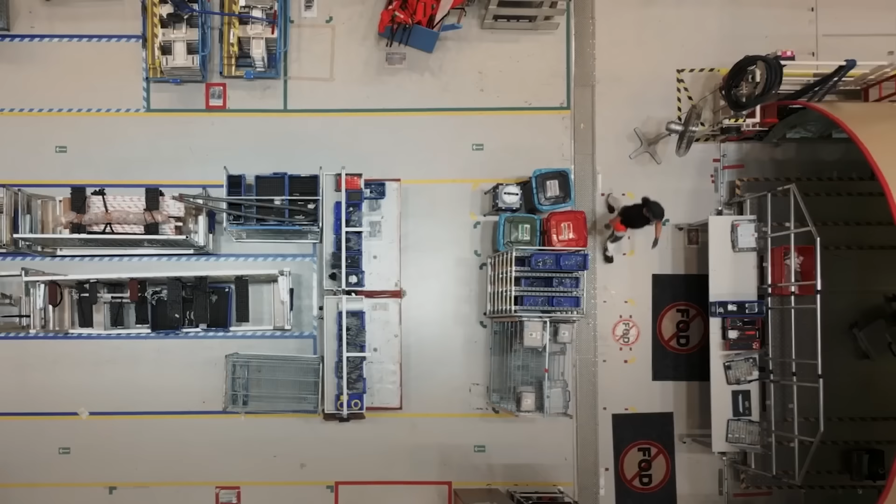This is a move that could signal the development of a brand new Airbus aircraft and could therefore trigger a reaction from Boeing and other competitors. So what was it? Stay tuned.

I have focused heavily on Boeing during the last few years, and probably because of that, many of you guys have been asking, when are you going to cover Airbus and what they have been up to? Now, believe me, we have been looking for Airbus stories, but honestly, Airbus are a bit tougher of a nut to crack than Boeing is at the moment.

They actually seem to be pretty good at resolving problems quietly before attracting too much attention from the press and also from industry insiders like myself. But that doesn't mean that it's been completely quiet around them.

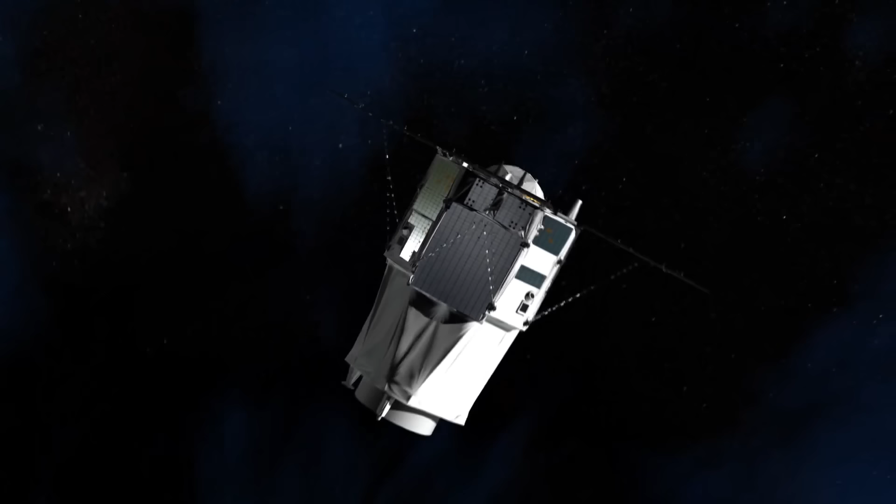In 2020 and 2022, Airbus settled corruption charges relating to sales of airliners, helicopters and even satellites to various governments worth over $3.7 billion. But that's more or less how these Airbus stories tend to go. You hear something vague about them in the news and then it just kind of fades into the background.

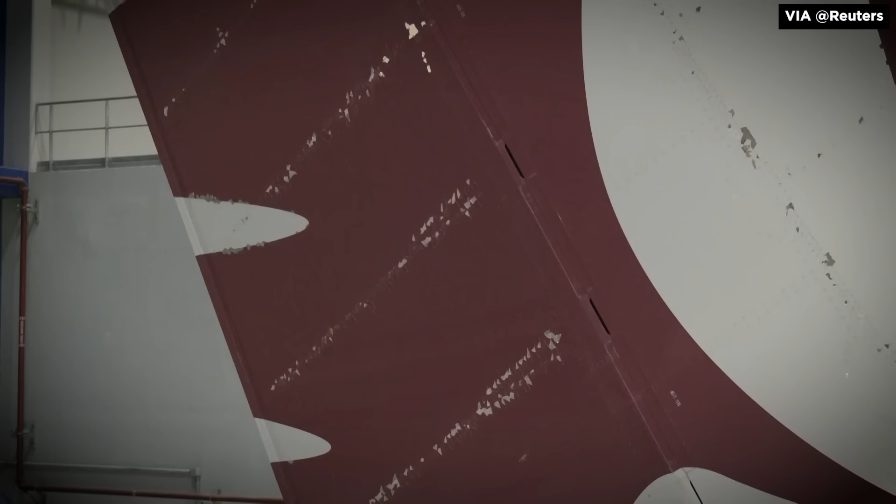The only exception to this was the really public and ugly spat between Airbus and Qatar Airways regarding premature damage to its Airbus A350 fleet, which I've covered on this channel before. And that issue seems to have now been completely resolved.

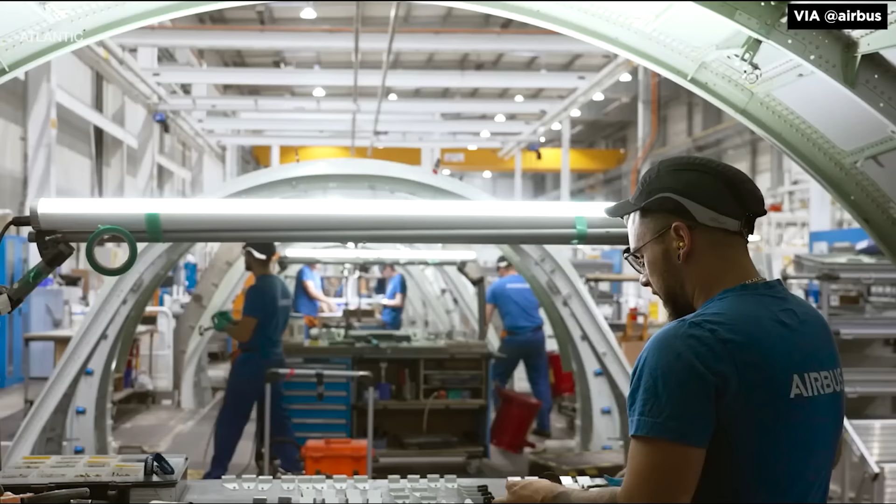But a little bit more importantly, we haven't really heard of anything concrete from Airbus about any plans to develop something new, or even to take advantage of those Boeing problems. The new Airbus A321XLR has entered service over the past few months, but that's a program that started quite a while ago, well before Boeing's 737 MAX crisis.

The one program that Airbus did launch more recently is a freighter version of its Airbus A350 widebody. Now, that is a threat to Boeing, who have always been the king of air cargo, but while cargo is important, the short and medium-haul side of the passenger jet market is where most of the industry's eyes are right now fixed. And in that market, Airbus has, so far, stayed mostly quiet.

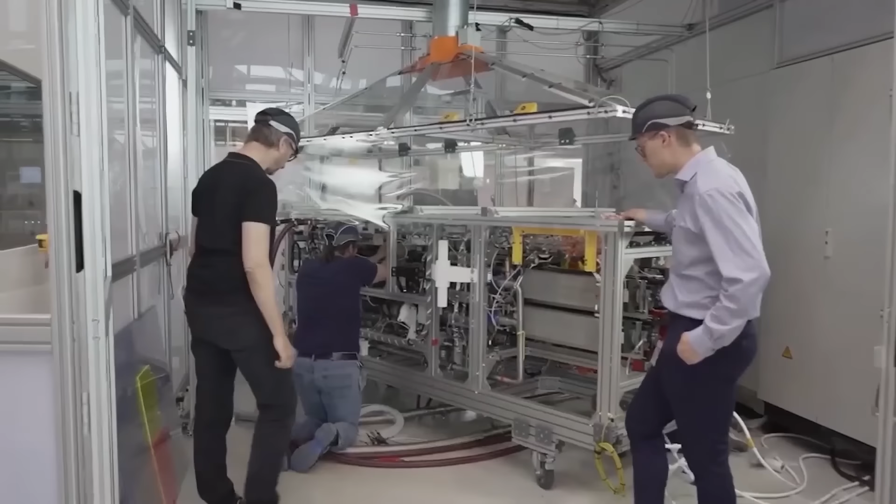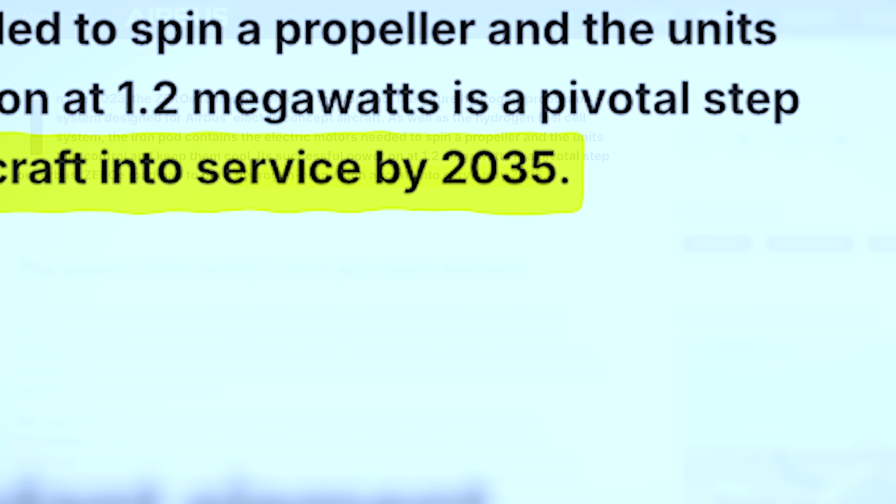The only thing that the European manufacturer has talked about over the past few years that would fit in this particular size category is its ZEROe program, which is an Airbus group of concepts for future hydrogen-powered aircraft. Since launching ZEROe in 2020, Airbus have publicly stated that they aim to put the first hydrogen airliner into service by the middle of the 2030s, but they haven't formally launched anything specific yet.

Now, before making that decision, Airbus would likely need to flight test a few different concept ideas of such aircraft, plus they would need to ensure that things like the production and supply of renewable hydrogen would make the program feasible in the first place.

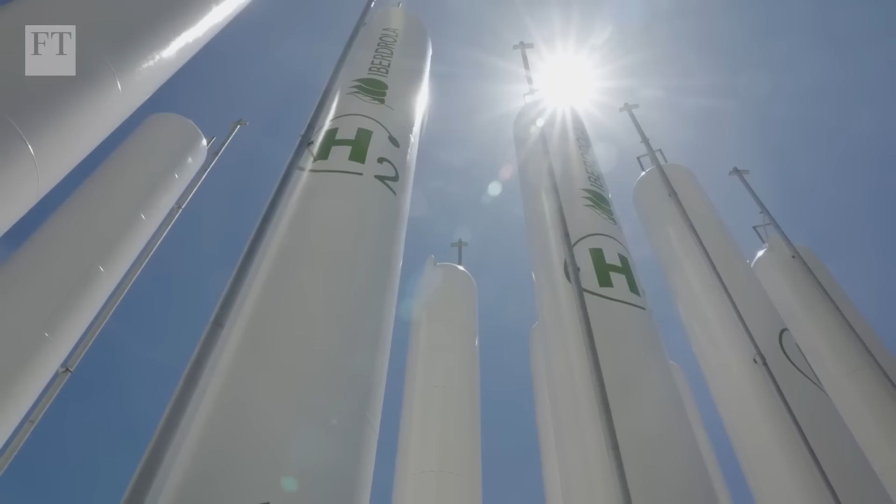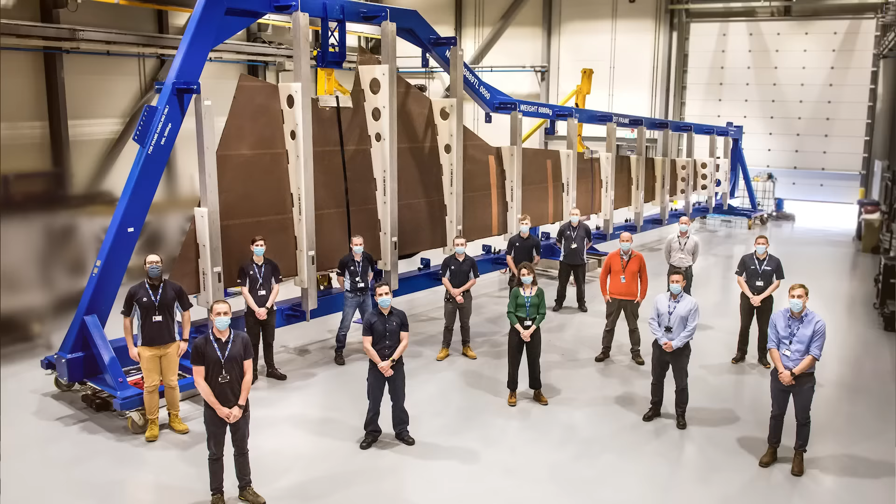Now, it would be unfair to say that Airbus haven't been working on any technologies that would be useful for something new in the size category of an Airbus A320 or a 737 during this time. For example, they have long-running projects like the Wing of Tomorrow, examining both the design and manufacturing of composite aircraft wings.

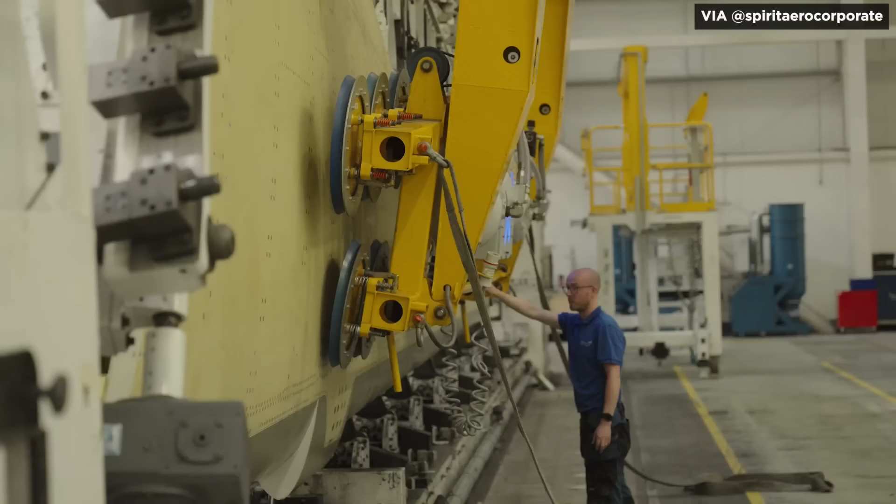Now, I'm sure that many of you know that Airbus already makes composite wings for its A350, and they also have such wings made for the Airbus A220 by Spirit AeroSystems in Belfast, Northern Ireland. But getting that technology ready for replacing the production of the Airbus A320 wing, for example, is much harder.

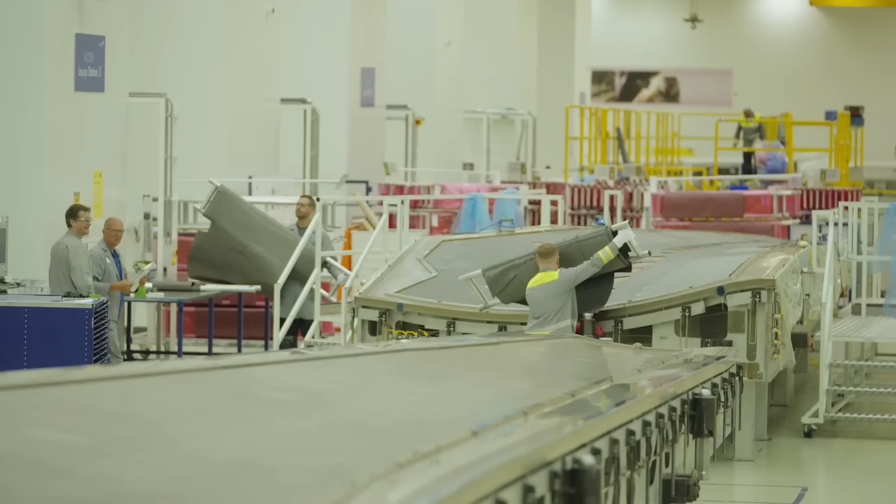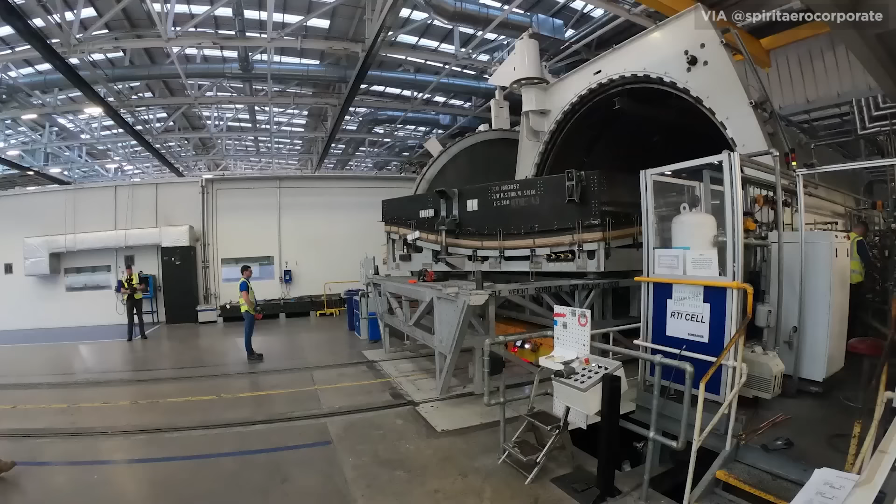Today, large sections of these composite wings need to be put together in special jigs, and then they need to be cured, or basically baked, in wing-sized pressurized ovens called autoclaves. That process isn't just expensive, it's also time-consuming and difficult to scale up to high rates of production.

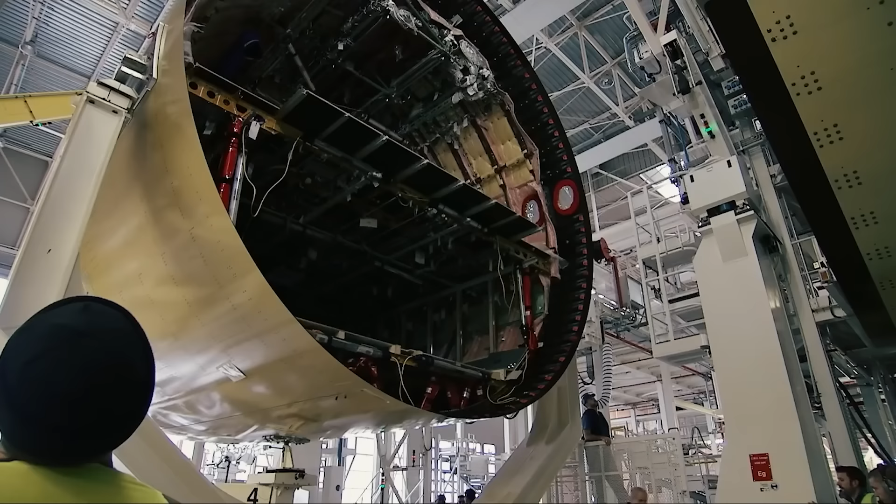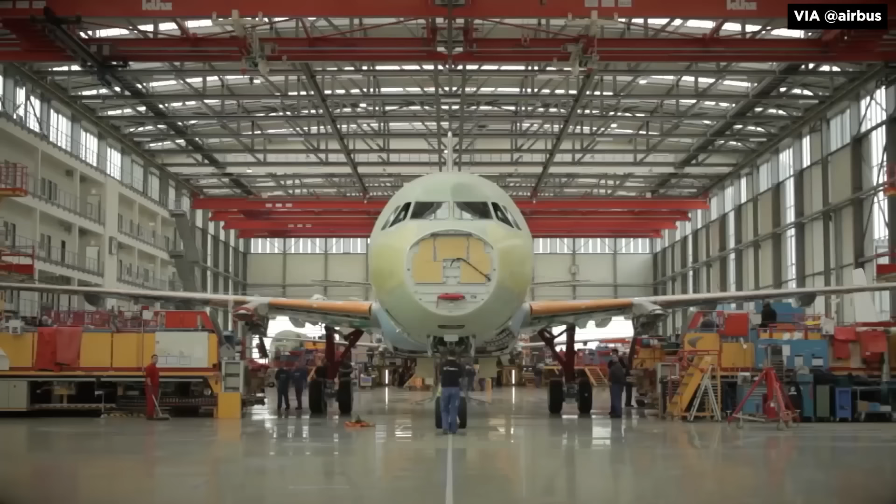Airbus currently makes well over 40 Airbus A320neo family jets per month, and they're aiming at eventually getting that number up to even higher, around 70 aircraft or even more. Now, the Airbus A220 is getting awesome reviews from both airlines and customers, but its composite wing is actually one of the reasons why Airbus is really struggling to increase its production rate up to the double digits per month, which is really needed in order to make that program profitable.

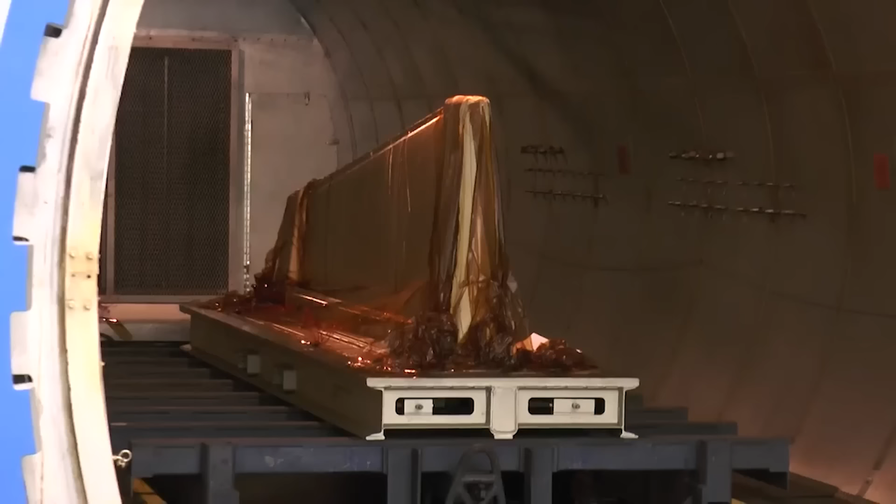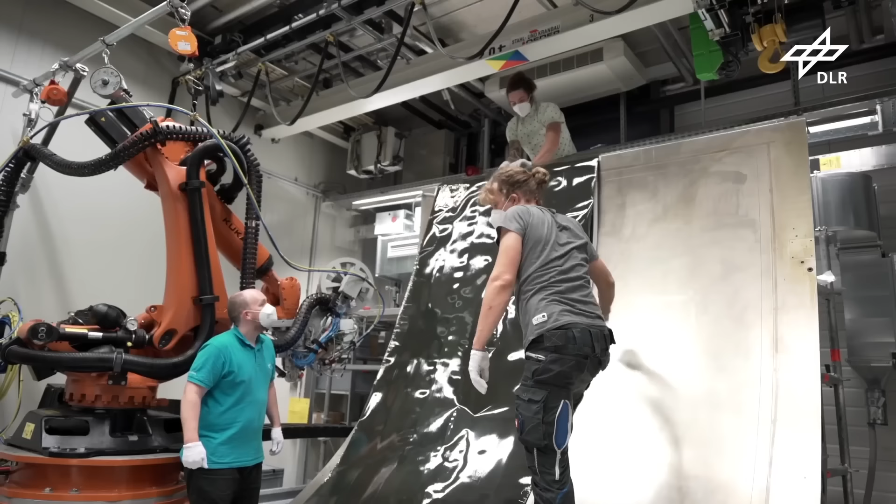Now, there are technologies that could help increase production of things like composite wings, like an out-of-autoclave curing, and both Airbus and Boeing have been working on them for years. But again, so far, there's no real program for a new Airbus or Boeing aircraft that would be attached to these new technologies. So, these design and manufacturing developments have therefore been for the future, along with other new potential building blocks or technology bricks, as Airbus likes to call them, like thermoplastic fuselages, which are both lighter and quicker to put together than other composites are.

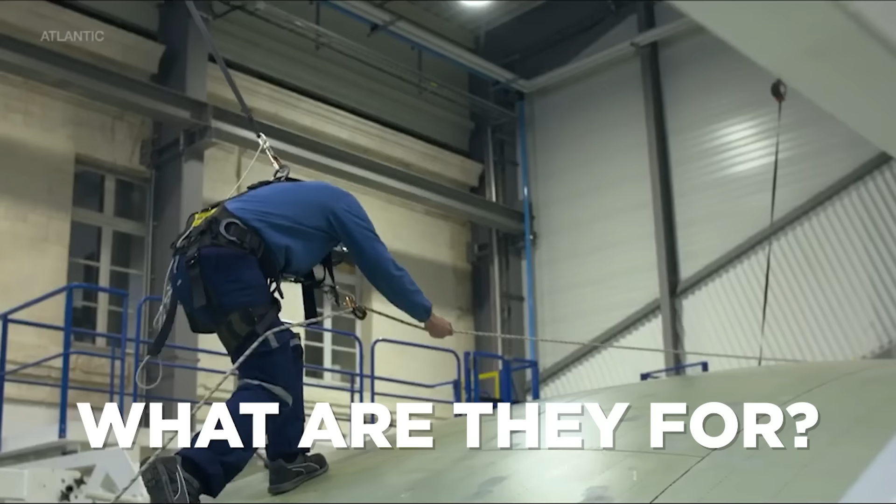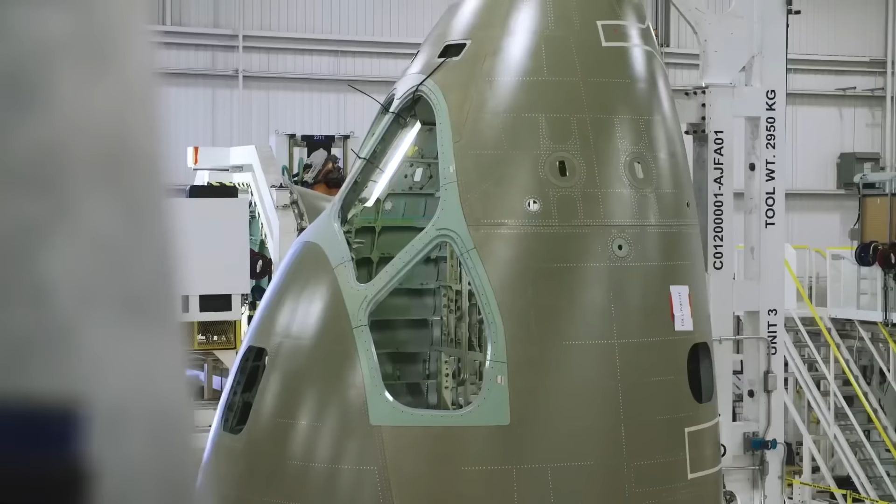And crucially, despite the apparent lack of any new aircraft program on the horizon, Airbus has been progressing with all of these technology bricks, so that kind of begs the question, what are they for? Well, one hypothesis from many analysts has been that Airbus could simply use these technologies to update something. They could, for example, re-wing the Airbus A320 family and maybe also lengthen the Airbus A321 to add a few more seats to it. Or perhaps they could even update the production of the Airbus A220 to increase output and finally make that one profitable.

But more recent developments are actually pointing somewhere completely different. You see, Airbus might instead be about to launch an all-new replacement for the Airbus A320 family. And that aircraft would obviously benefit from all of these possible design and production improvements, and from updates in engines, which I'll get back to shortly. So, why am I saying this? What did Airbus do that makes a launch of a new aircraft using all of these technologies much more likely now? Well, as it turns out, it's all hidden in an obscure interview.

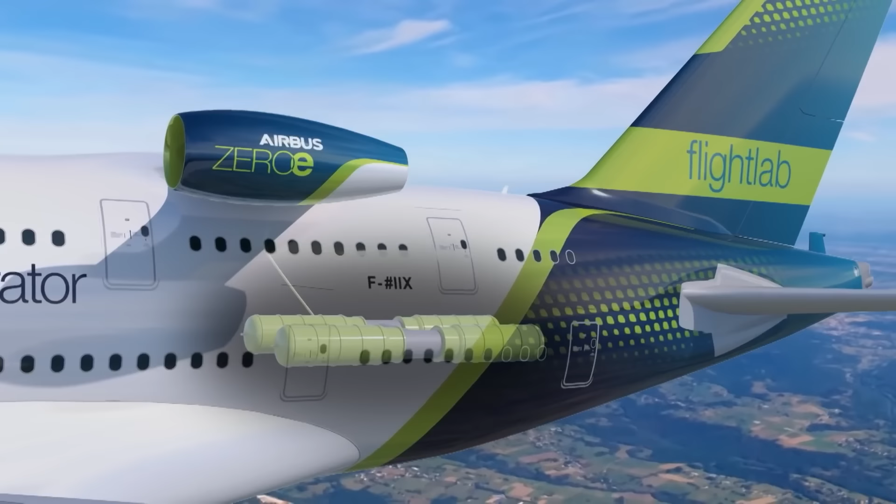Like, for example, their reasoning that the limiting factor for hydrogen is not so much the aircraft side of things, but instead the availability of a proper hydrogen ecosystem that would realistically be able to produce, transport, store and deliver hydrogen to airports worldwide. It is also worth noting here that Airbus didn't break this story in a traditional press release.

Instead, this appeared in the French press when Airbus were responding to questions from a French trade union, where they revealed that they had cut the budget for the Zero-E hydrogen program by 25%.

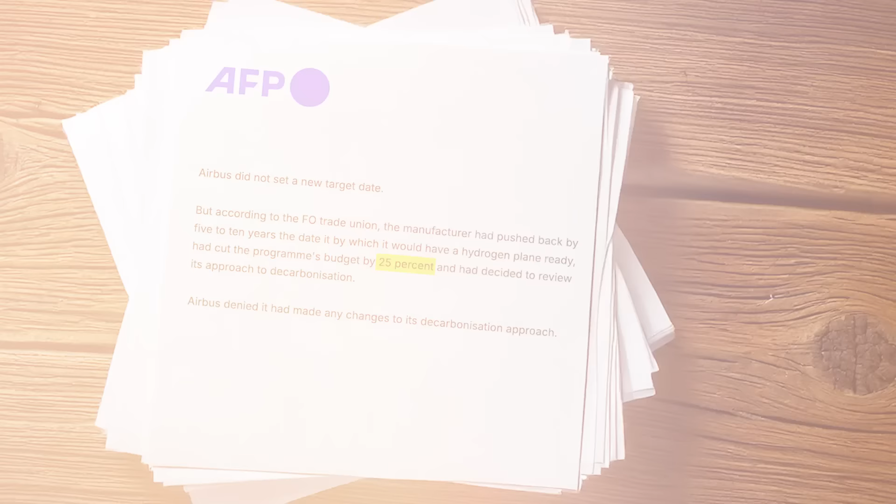And crucially, Airbus has also cancelled plans to run an Airbus A380 testbed with a fifth hydrogen engine mounted high up on its fuselage. Airbus originally had plans to test two versions of this concept, a small jet engine that would burn hydrogen and a hydrogen fuel cell setup with an electric motor running a propeller.

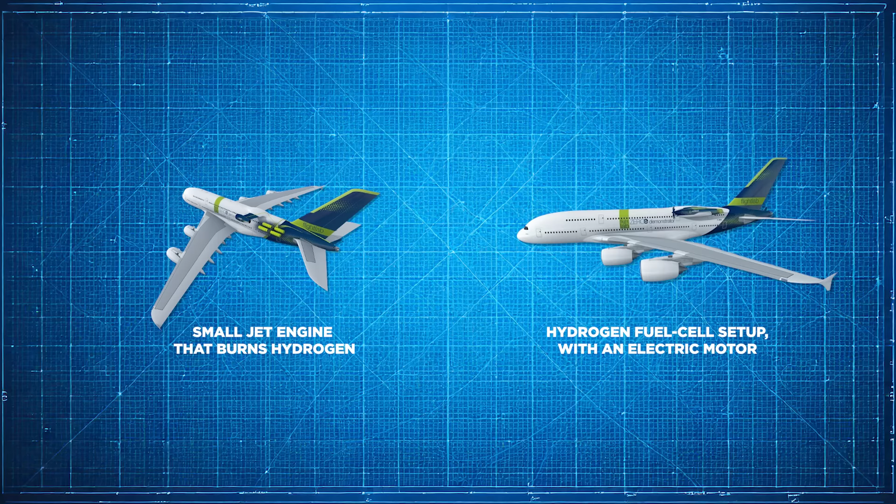Now, this cancellation is important because that testbed was supposed to show the effects of operating such engines at high altitudes. For example, they would show if burning hydrogen in a jet engine would create really thick contrails, which could cause some problems. But why is this decision so important right now?

Well, one key detail, which I didn't mention before, is that the original 2035 service entry goal for the first hydrogen-burning Airbus meant that Airbus' next new airliner would therefore definitely run on hydrogen. Airbus made that very clear when they launched the Zero E program in 2020, and they then repeated that same thing in 2022.

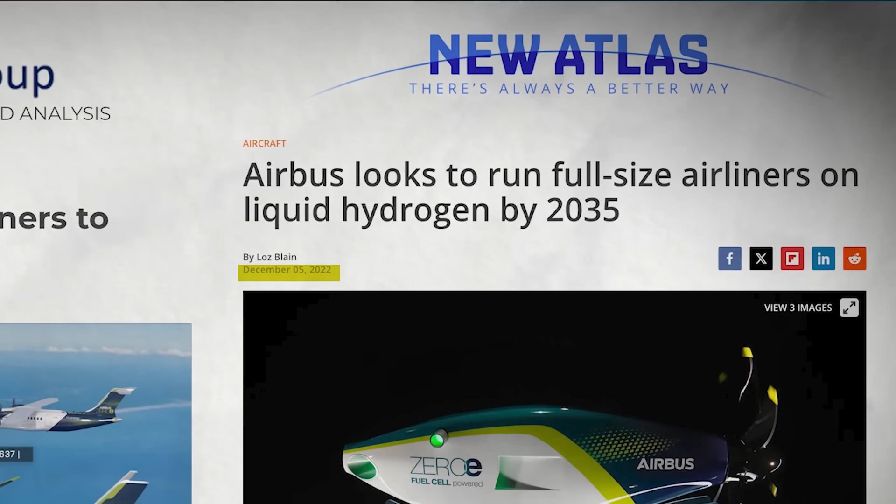Now, since then, Airbus have been trying to kind of water down those statements a little bit. In various interviews from 2023 onwards, Airbus CEO Guillaume Faury has suggested that the next generation of Airbus aircraft could do a little bit of both. He has mentioned that this new aircraft could have versions running on jet fuel or sustainable aviation fuels and other versions with hydrogen tanks on board.

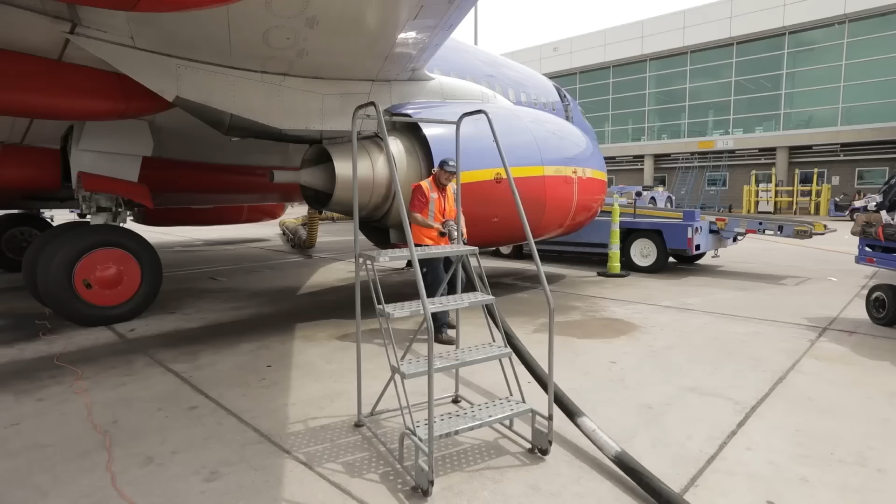Now, on the face of it, those plans have always sounded a little bit questionable. You see, unlike jet fuel, which we can easily store in our aircraft wings, hydrogen needs pressurized and supercooled cylindrical or even spherical tanks that therefore need to be inside of the fuselage.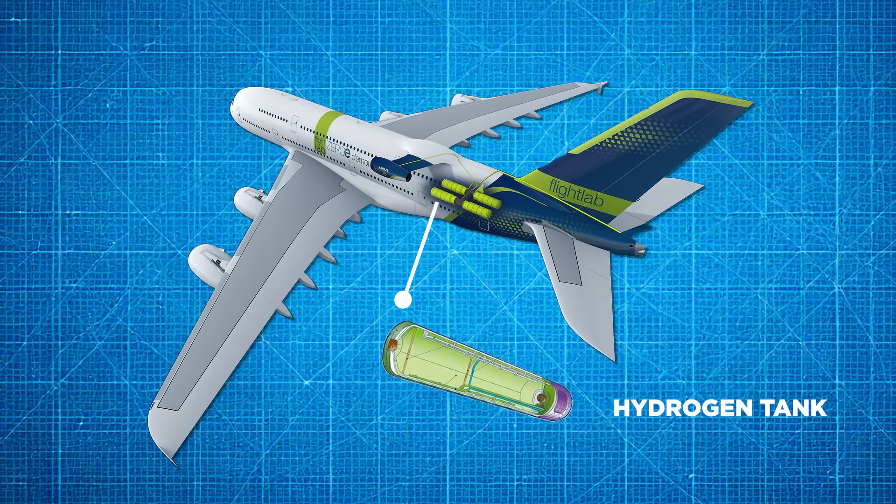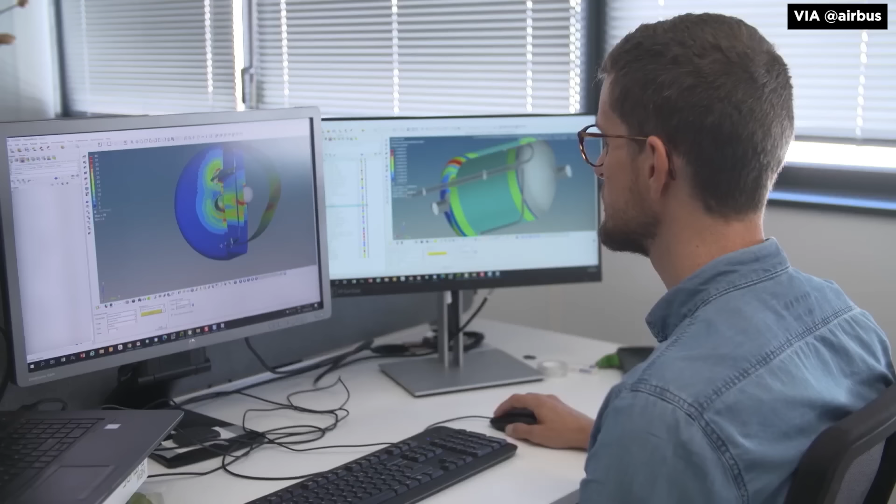Now, in theory, you could design an aircraft that could handle both, but the whole point of developing an all-new airliner design, rather than just updating something with new wings and engines, is to take advantage of all available technological advancements. To do this, the new design would need to be optimized around a specific setup, so compromising by offering such radically different options seems, well, really expensive and also an additional complication on something that's already quite complicated.

So with that in mind, up until now, we didn't really know what Airbus was truly up to. They could be following a two-step approach with, let's say, an updated Airbus A220 that would include new engine options, plus a long-promised stretch, making it compete better with, for example, the Boeing 737. And they could then have that version run on sustainable aviation fuel, or SAF, in addition to normal jet fuel.

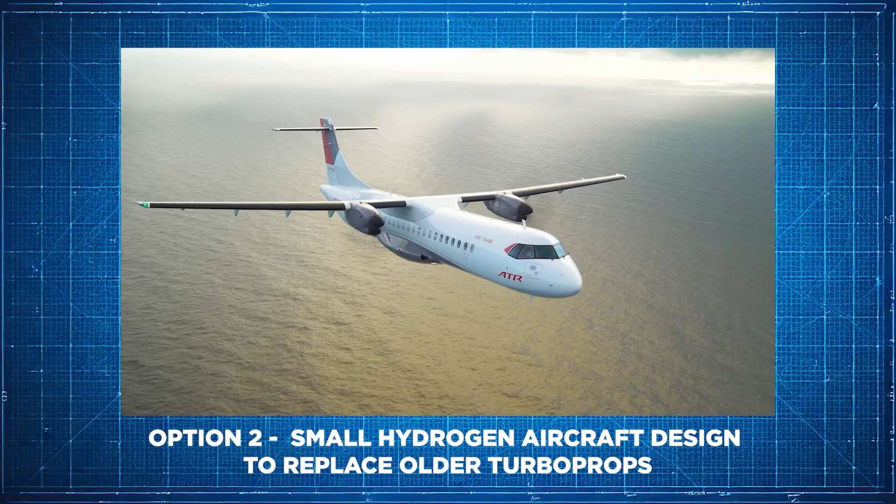Then as a second step, they could still plan to introduce a small hydrogen aircraft design, for example, something with 50 to 80 seats, that would replace turboprops like the ATR-72 and the De Havilland Dash 8. And they could then create something even bigger in that format a little bit later. So why change that now?

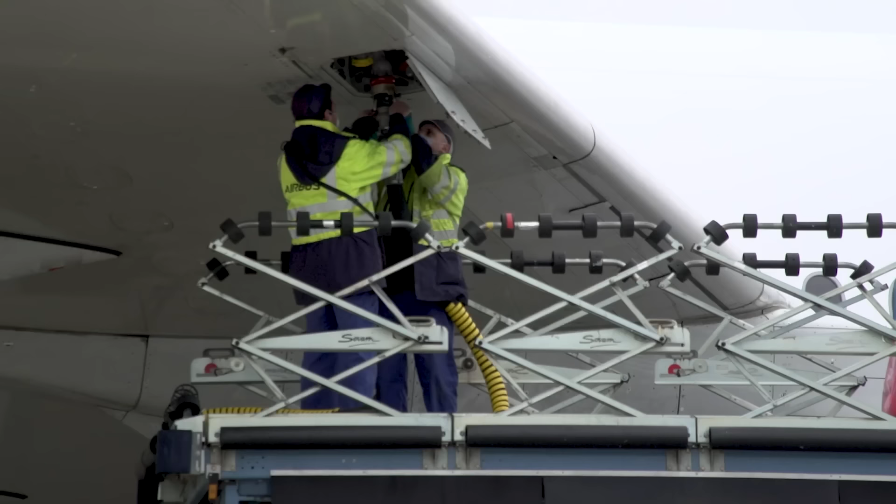Well, the news is that Airbus believes that the ZEROe hydrogen program could get delayed by as much as 10 years to around 2045 or so. That's quite a big delay for a 4.5-year-old program. And crucially for this video, that new timeline means that Airbus now need an all-new aircraft, something running on normal jet fuel or SAF. And they need to launch that aircraft and bring it to market reasonably soon. So why is that then?

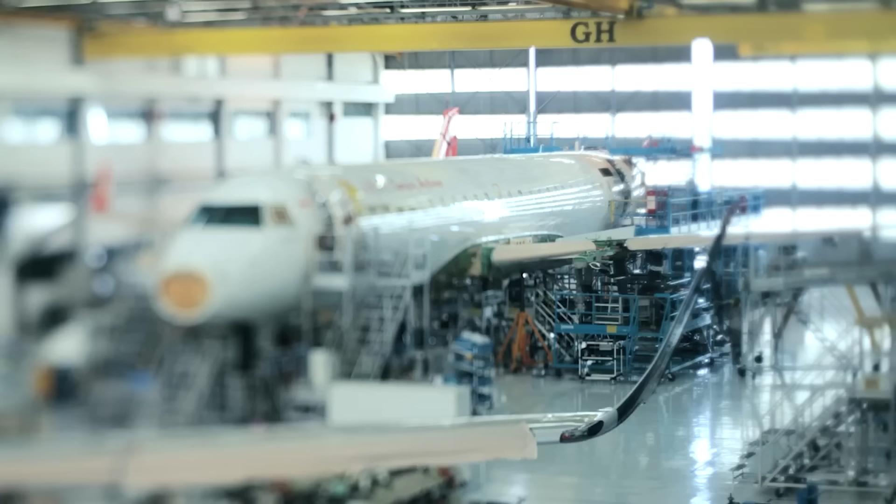Well, firstly, it is getting more and more clear that the market needs newer, even more efficient aircraft. I recently made a video where I looked at Embraer and whether or not they could become a real threat to Boeing and Airbus. And the main point that I made in that video was that the market really wants them to design and build a larger aircraft to possibly compete with the Airbus A320 and the Boeing 737.

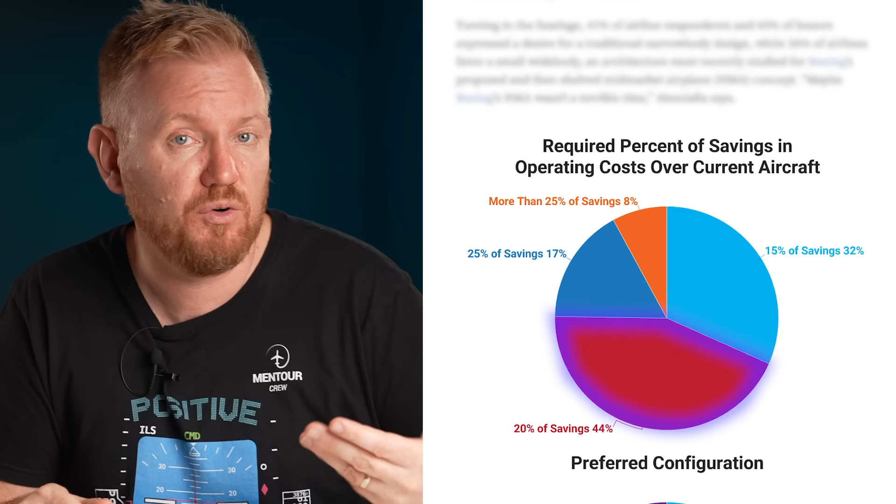Now, since we released that video, Aviation Week released a survey showing just how much the airlines and lessors wanted a third player like Embraer to enter the fray. A lot of the respondents said that they would support Embraer purely because they think that a third player would be a good and healthy thing for the industry. But crucially, 44% of respondents also said that they would be happy if that new aircraft could give them a 20% saving over current Airbus A320neos and 737 MAXes.

And another 32% said that they would be satisfied with only a 15% saving. Now, that's super important because Boeing, for example, has previously said that they wouldn't launch a new airliner until they could get an efficiency gain of 25% or more over the 737 MAX. But in reality, only 25% of respondents felt that such a high improvement would be necessary.

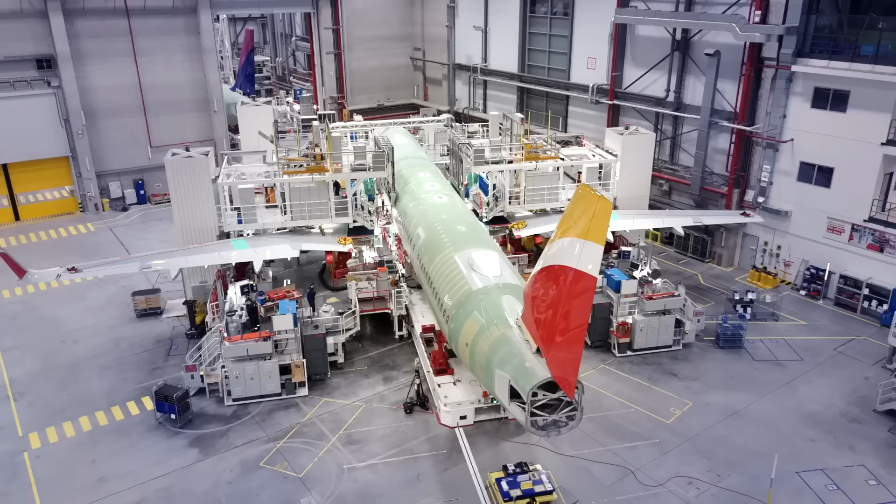Now, I'm not trying to suggest here that Airbus might be afraid of Embraer. That's not really the point here. Instead, what these numbers show is that in general, customers are much more ready for a new plane than Boeing and perhaps Airbus previously thought. But even to get that 20% saving that the airlines and the lessors want, Airbus would realistically need the engine and airframe improvements that only an all-new design could bring.

And on top of that, there is also a simpler reason why Airbus needs to introduce this all-new airliner right now. You see, if we really will see a generation of hydrogen-powered aircraft starting by the mid-2040s, then any new design that gets introduced before that will have a limited amount of time to recoup that investment. Now, of course, the first hydrogen-powered aircraft will almost certainly be smaller, so an aircraft the size of an Airbus A321, for example, will likely still have quite some time to stay relevant.

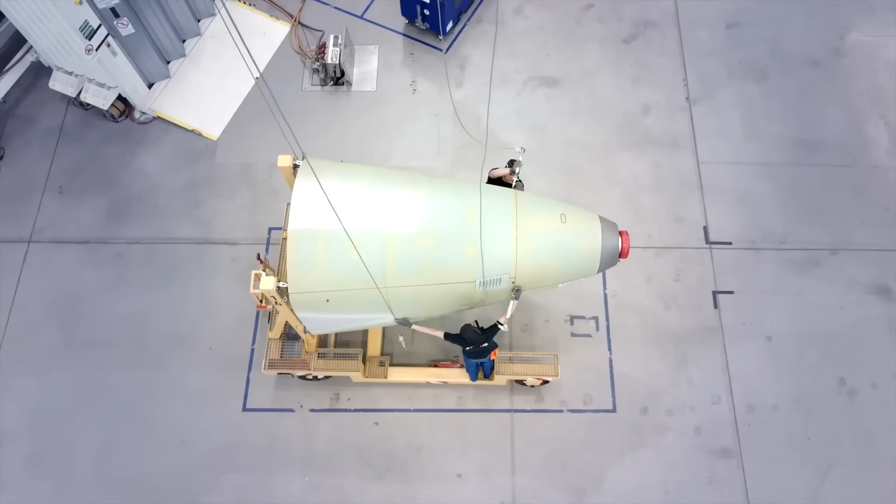But in any case, the point here is that now we have a much better idea of what Airbus is up to. And that change in strategy isn't affecting just them. In fact, a move like that would completely rebalance the competitive field around jet engines, which immediately brings me to something a little bit awkward.

You see, just recently I made a video about the Rolls-Royce UltraFan, and I explained how Airbus and Rolls could bolt it onto an Airbus A350 to create an Airbus A350neo, and that Boeing then wouldn't have an answer to that, probably for years. But in that same video, I also said that since Boeing is still busy with its own problems, Airbus isn't in a hurry to launch a replacement for the A320neo family. Now, obviously I recorded that before reviewing this survey that I just showed you and before considering the possibility of these recent changes that Airbus has announced.

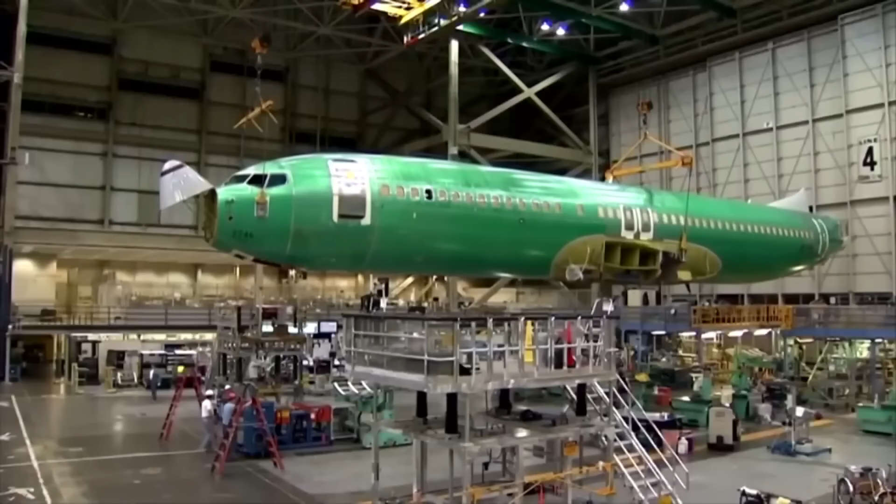And in any case, the point here is that a new aircraft from Airbus, or Boeing for that matter, will aim to replace the most popular airliners that are now available in the world. And there's no question that all of the major engine manufacturers will want a piece of that pie. As I said in that Rolls-Royce video, the British engine maker was at one time talking with Boeing about a version of that engine for a potential 757 replacement, the 797. So them instead making one of these engines for an Airbus A320 replacement is obviously a no-brainer.

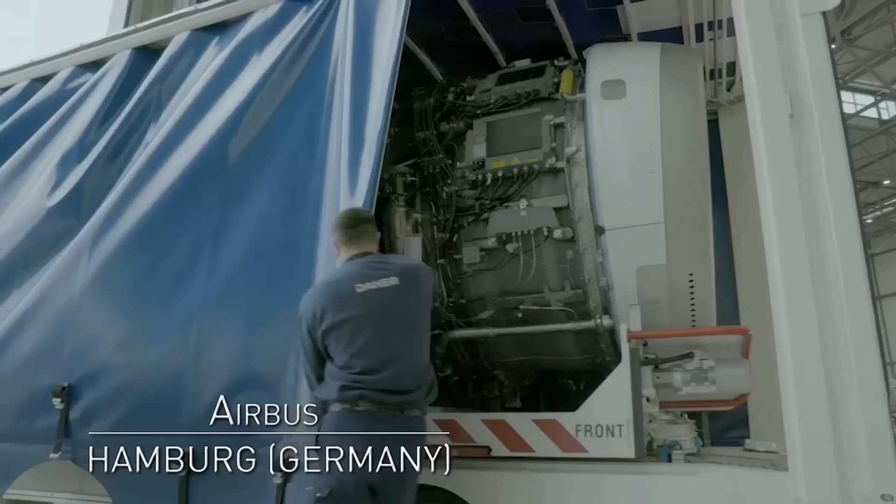Pratt & Whitney already make a version of their geared turbofan for the Airbus A320neo, and a newer version of that, perhaps making use of newer materials that solve some of its early problems, would almost certainly be a good fit for this newer plane as well. That leaves CFM, the 50-50 venture between General Electric and Safran, who makes the LEAP-1 engine for both the Airbus A320neo and the 737 MAX families.

And here things are a little bit more complicated, because CFM is also developing a more radical, open fan design called the CFM RISE. Now, as I've explained in other videos, that engine is probably the most promising in terms of raw efficiency gains, but an aircraft the size of an Airbus A320 or the 737 would likely need to be configured and built specifically in order to use it. And that's because the effective diameter of this engine is going to be truly huge.

Imagine trying to fit an engine for a Boeing 777 under the wing of an Airbus A320 and you get the idea. To make that work on a low-wing aircraft, like most airliners that we have today are, the wing would need to be bent upwards in kind of a gull-wing configuration. And I have actually shown that Airbus has already presented a concept like that a while back, so there's no question that they're considering the RISE for any future project that they might be working on. But in addition to any other development challenges, choosing an engine like that would effectively make this Airbus A320 replacement a single-engine option aircraft.

Now, that's something that Airbus haven't seemed to mind for its wide-bodies. The A350 and the A330neo currently have only Rolls-Royce engines, for example, but for their single-aisle aircraft, Airbus has traditionally preferred to offer a choice of at least 2 different engines. That's what they did with the original A320 family and then repeated for the Airbus A320neo family as well.

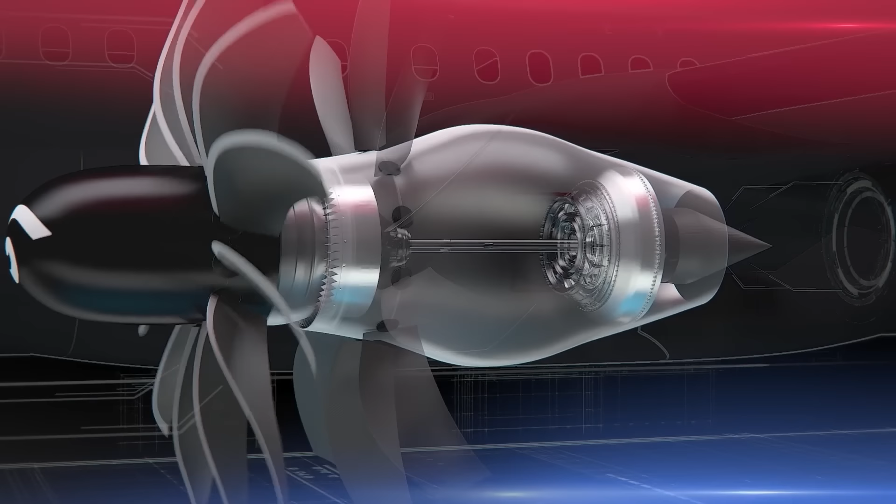So if that's what they want this time around as well, well then the RISE open fan might not be the best choice. Of course, there's nothing stopping CFM from offering a more conventional engine as an option. Perhaps a LEAP with a geared fan borrowing from some of the lessons that they've learned in the RISE program. In fact, that's what I think that CFM will ultimately do here.

Now, obviously, there's also another industry player that would be affected by this Airbus move that I haven't mentioned yet, and that's Boeing. What would Boeing do if Airbus suddenly launches an Airbus A320 replacement with a service entry at around 2035 or so? Or if I put it another way, what can they do?

Well, I don't have a crystal ball here, but given the recent changes in the United States, I find it very hard to imagine that the new administration would let Boeing fall even further behind from where they already are. In the past, the US and Boeing have accused the European Union of subsidizing and otherwise supporting Airbus, but now I wouldn't be surprised to see Boeing get a bit or even a lot of state funding, frankly just to help them stand on their feet and take on such a gigantic challenge. Because a gigantic challenge it would definitely be.

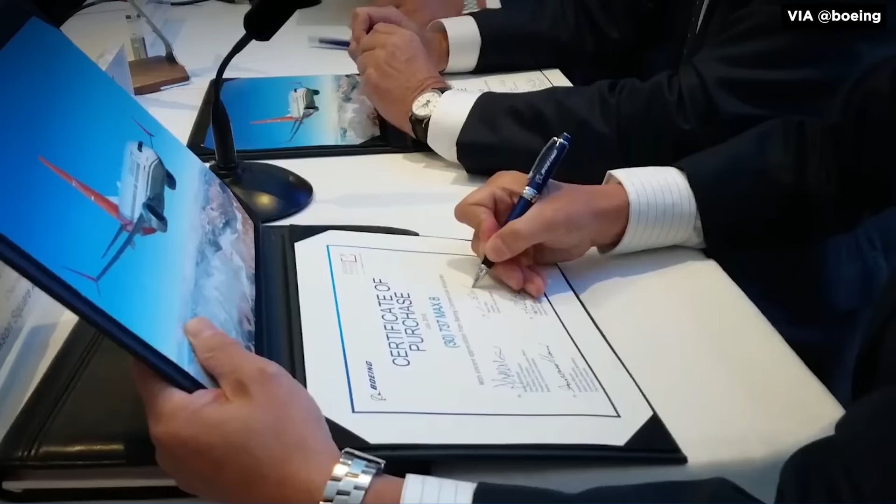Finally, another factor here is that whenever a manufacturer replaces an existing aircraft family with something new, there is an inevitable risk that some customers who have already ordered the existing aircraft will switch over to the new type if they can afford to wait a little bit longer. Now, normally, aircraft manufacturers really don't like this because they get most of their money when they deliver each new plane to their customers. So switching orders to planes that will get delivered even later will hurt their liquidity a lot. But Airbus today has a crazy long backlog for new aircraft orders.

If you order a new Airbus A321neo today, you might not get it until in about 8 years or even longer than that. So this means that Airbus doesn't actually have a lot to lose. If some or even a lot of customers switch over to this new aircraft, that will just mean that they can offer quicker deliveries to their more impatient existing customers, and deliveries will just continue. And with that, the cash will keep rolling in, allowing the funding of the newer aircraft to go ahead without any problems. Now, there is of course much more to be said here.

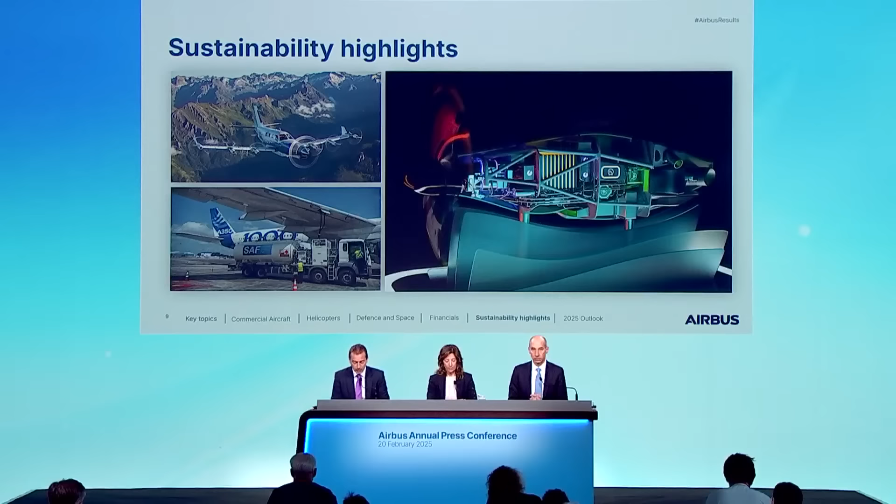We're recording this before the Airbus annual press conference on the 20th of February, where we will probably learn much more about the company's coming plans. And in that press conference, Airbus will likely have to answer to some really unhappy regulators or legislators who really don't want to see any delays in their hydrogen plans. And we still need to see the reaction of Embraer and other players in the industry.

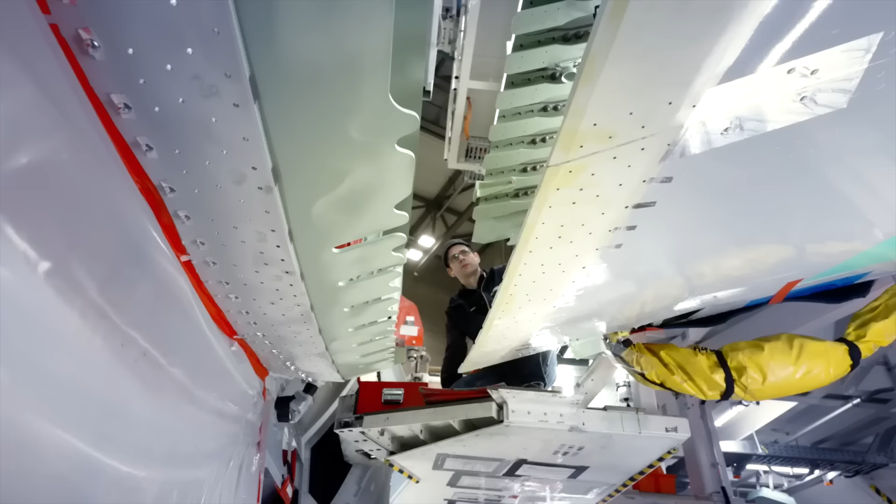So what do you think? Will we see a new Airbus aircraft being announced within the coming year? And what engines, materials and other features would you want to see in it?